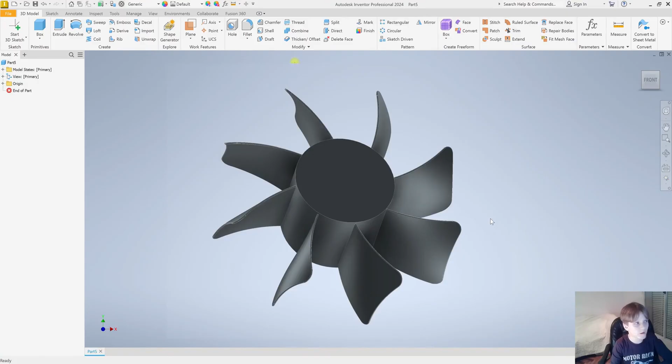In this lesson, I want to show you how to create a fan in two different ways. Let's start by making it using the first method.

Click Extrude, select this plane and create a circle. This will be the main hub from which our blades will stick out.

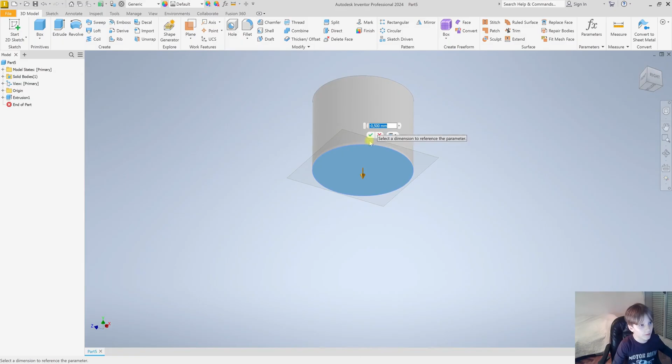Now let's click on Plane. Select offset from plane, choose this plane and move it by minus 0.500. Select this plane, do an offset from plane here as well, also by minus 0.500. Click right here to create a sketch on this plane.

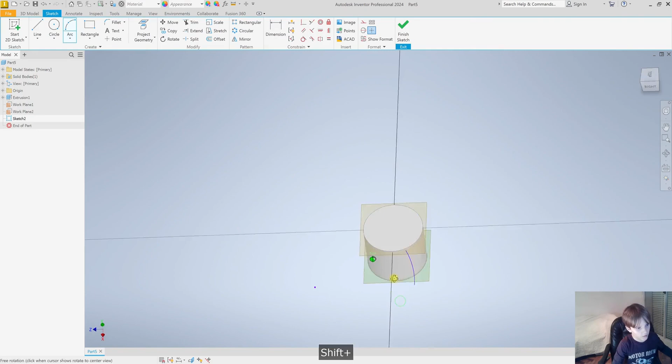We'll create an arc like this. Now select this point, this circle, and click this button right here. This is a constraint that will attach our point to the circle. Think of it that way.

Now let's select our bottom plane and make a sketch like this. Let's create the same arc. Select our point, select the circle, and apply the same constraint.

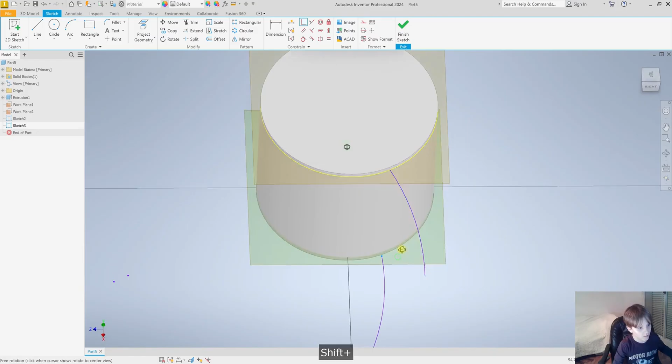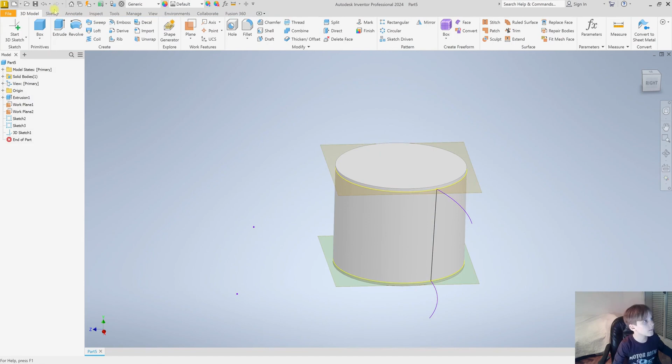Now finish sketch. Let's create a three-dimensional sketch. Take the line tool and connect this point to this one. Now let's create another 3D sketch and use an arc to connect this point and this point. Okay, now click Finish Sketch.

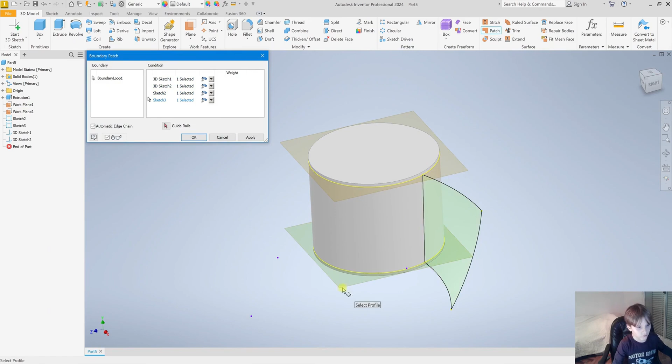The sketches and guide curves for creating our surface, the blade, are ready. Let's create it. Click Patch, select this line, this one, and this one. Click OK. Now we get this kind of surface.

I'll hide these planes. If you need to hide something, it's Alt plus V, Visibility. Select our surface and apply thickness to it. Enable this mode and set the value here to 1.

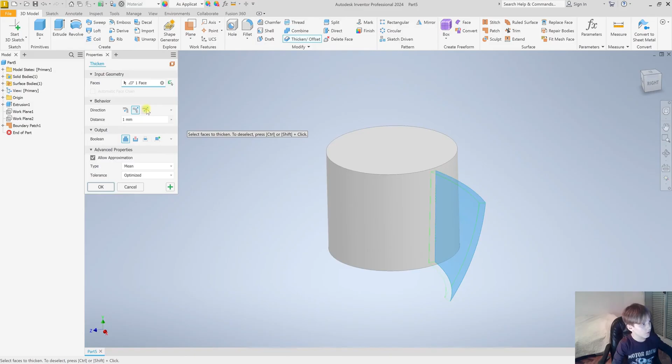Now let's do a fillet. Select this edge and set it to 2 millimeters. Now let's do another fillet and set it to 0.1 here.

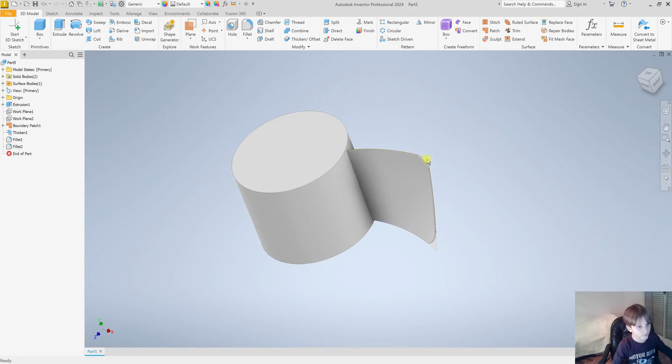Now let's edit this, our thickness, and enable the New Solid function here. Visually this hasn't changed anything at all, but in reality it has done quite a lot. This made our blade not a single piece with our hub, but a separate object, 0.1.

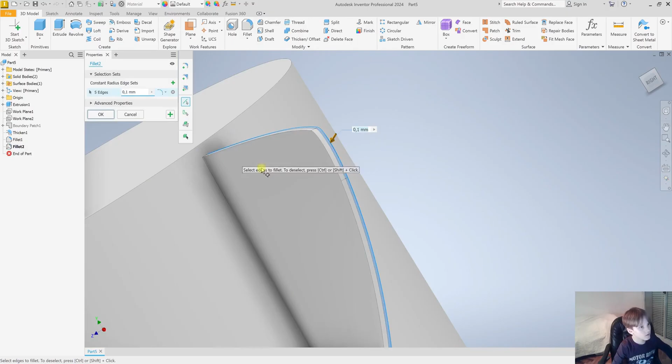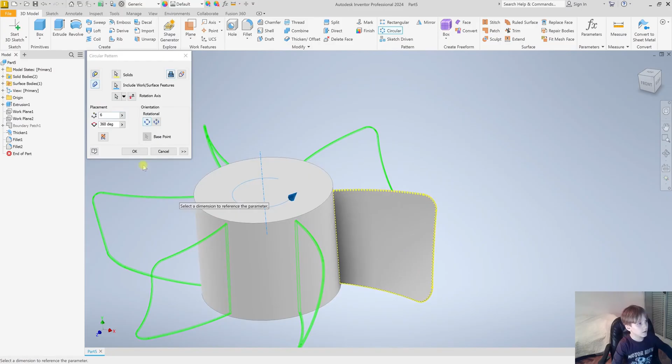Now let's do a circular pattern again. Enable the second mode, select solids here, choose our blade, and for the rotation axis select this edge. 6 or 8 instances, I'll set it to 8 so we have more blades. Okay, here we have our blades.

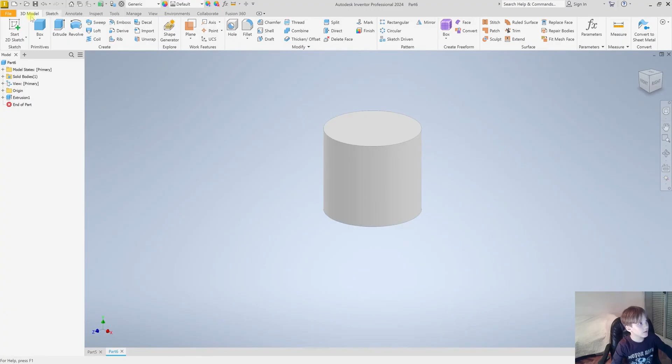Let's click on File and create a new part. From this point on, I'll be making our fan in a different way. We'll start creating it the same way with a round boss. Now let's create the planes. It all starts the same way, but from here on I'll do things a little differently.

Let's add the sketch and draw an arc. And here we create a fillet, like this right here. Let's click OK. We'll do the same at the bottom.

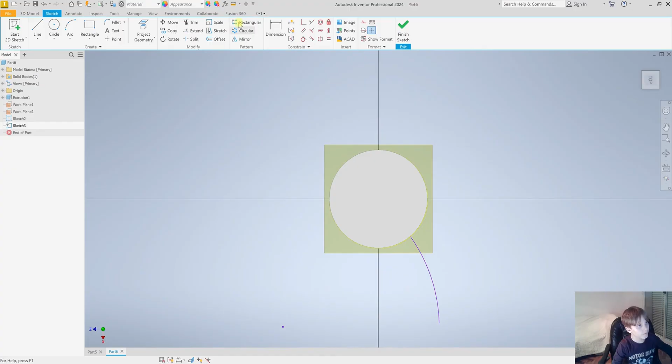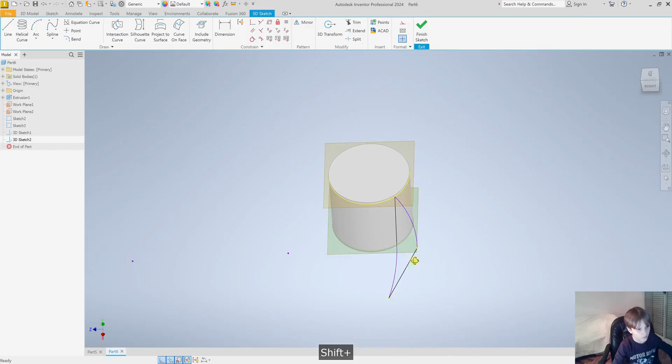For this method, I actually think a straight line would be better than an arc. But I drew an arc, an arc, an arc, well, an arc will work too. Here I drew a straight line. That's already the first difference.

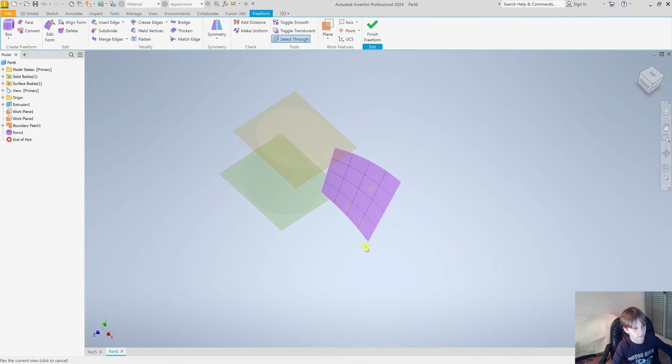Now let's make a patch. Create a patch. Okay, and let's use this button: Convert to Freeform. Okay, we can see the so-called polygons have appeared. Now we can start adjusting our shape as we need.

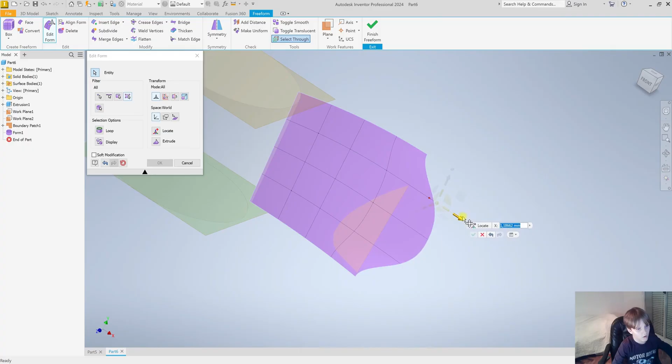Like this. Now you can adjust and get whatever blade shape you want. Let's hide this. Let's do it. Let's hide it.

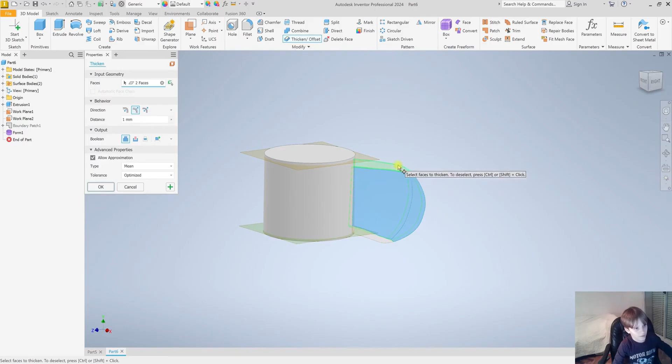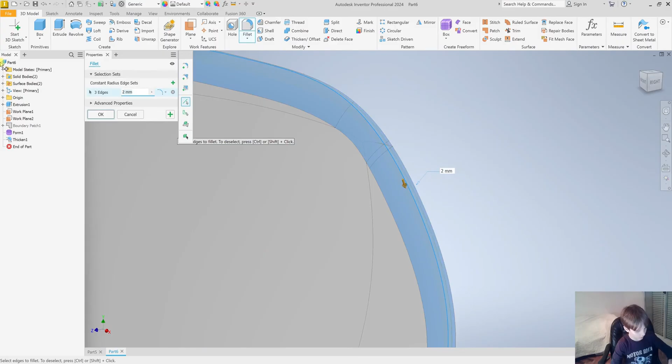Let's also specify a new object. Let's set it right away to 0.1. This is the kind of blade we get using this method. You can already see it's a different shape.

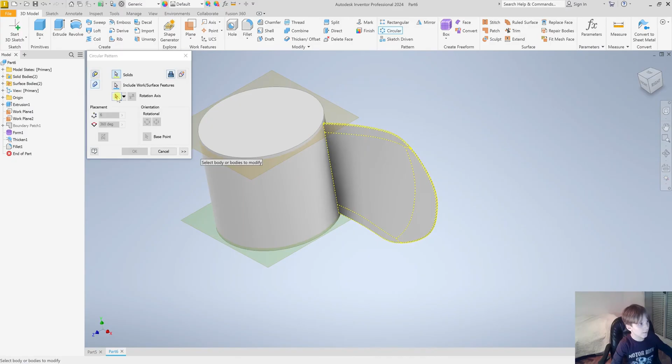Let's do a circular pattern. Let's switch to solid mode. Select our solid object, and for the rotation axis specify our rotation node. And also specify... 78, that's way too much.

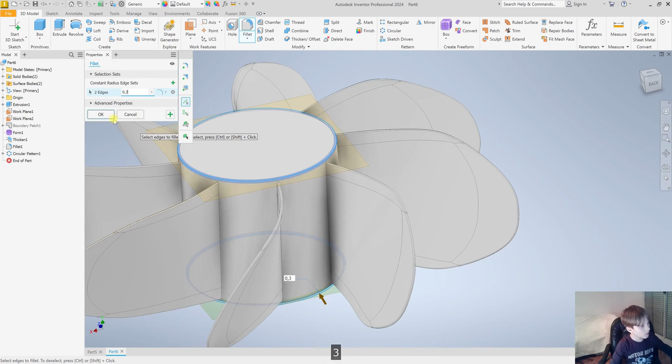And this time we end up with a different kind of fan. It looks more like something from a ship. So let's just do it like this, alright?